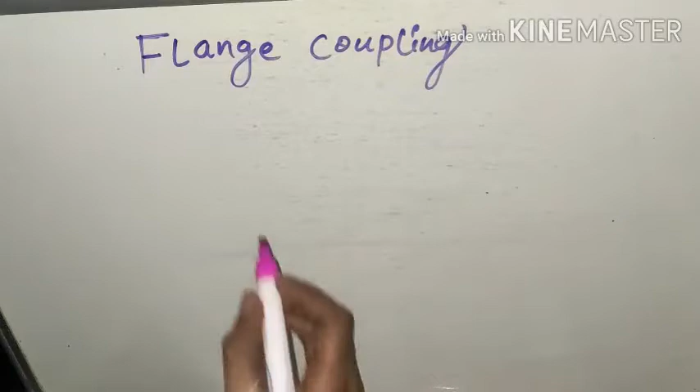Hello friends, we have a new topic, which you can see on your screen, and this is about a flange coupling. So what is a flange and why is it used in the coupling, what is the requirement of the flange coupling, all about this type of coupling and where it is used. All the details

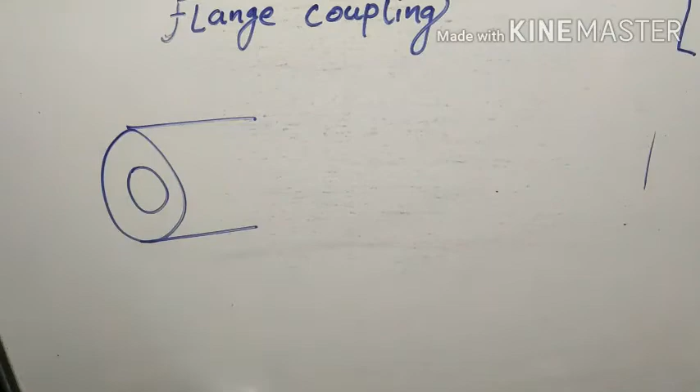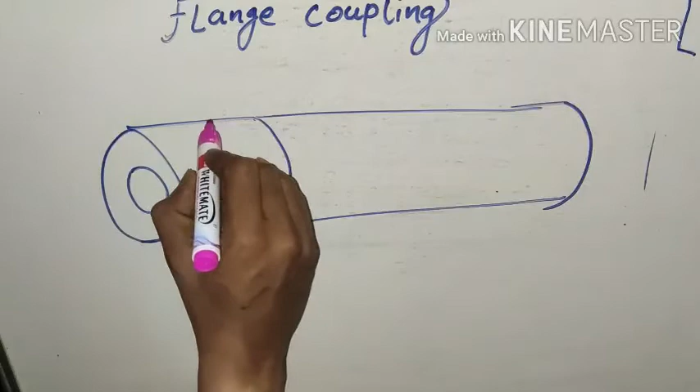Again we have another shaft like this, and now here we use two cast iron flanges like this. These cast iron flanges have holes for the threaded and bolted joint. They have recesses to insert the bolt or threaded bolt.

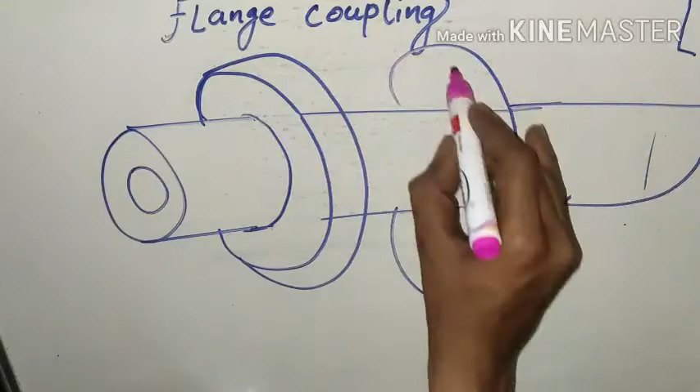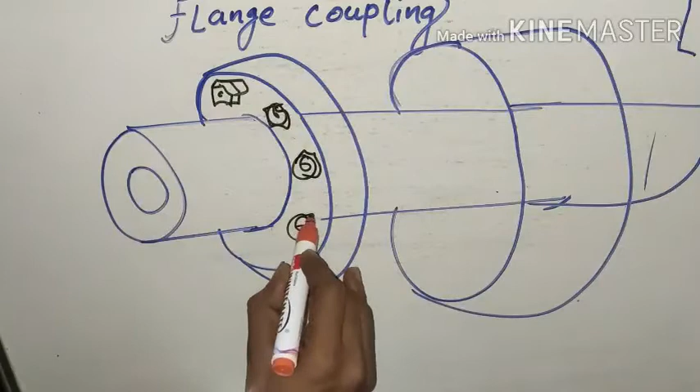So this one is your first, and again we use the other, same like this. As I already told, this has an arrangement for bolts and nuts like this, around 4, 6, 8 or 12 nuts are used. And there are recesses for both the flanges.

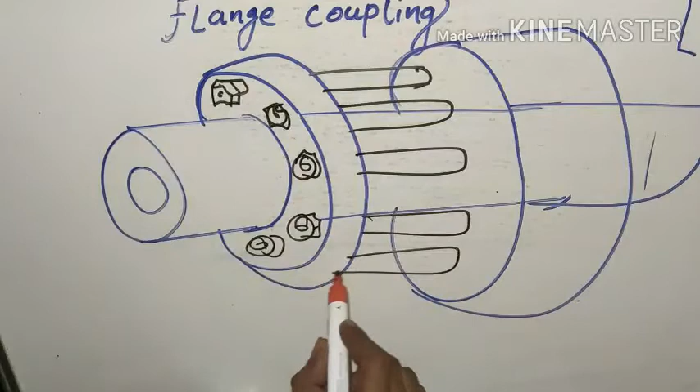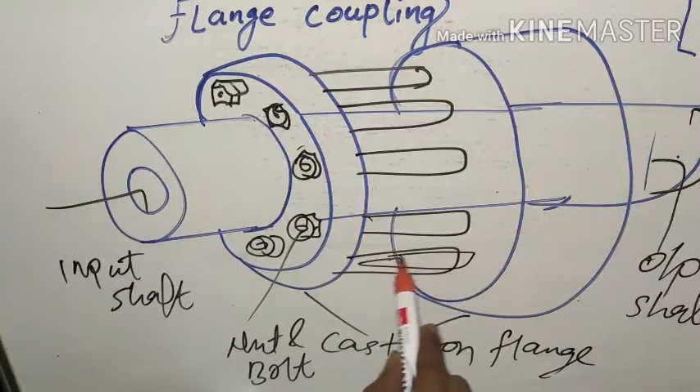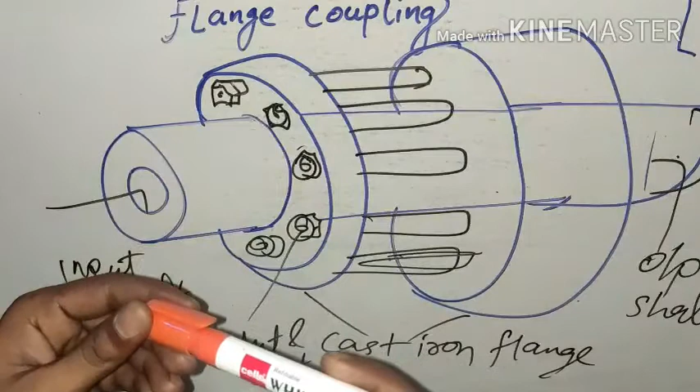So this is your cast iron flange. This one is your input shaft and this one is your output shaft. This is your nut and bolt arrangement. When these two come close to each other, from the end we use two cast iron flanges which have holes for inserting the nut and bolt. These flanges have recesses for inserting the nut and bolt.

So this is the most extensively used coupling. Its application: it is used for heavy loads and large shafting.

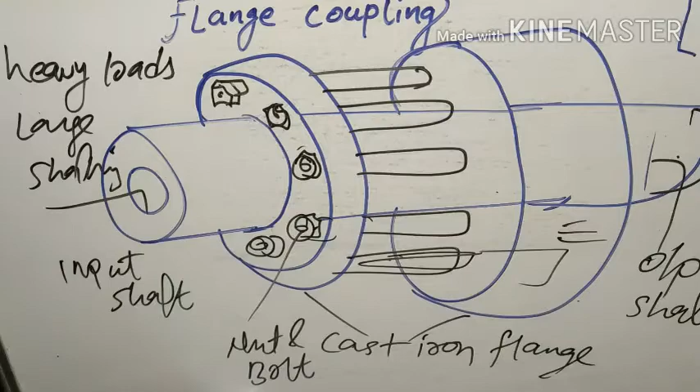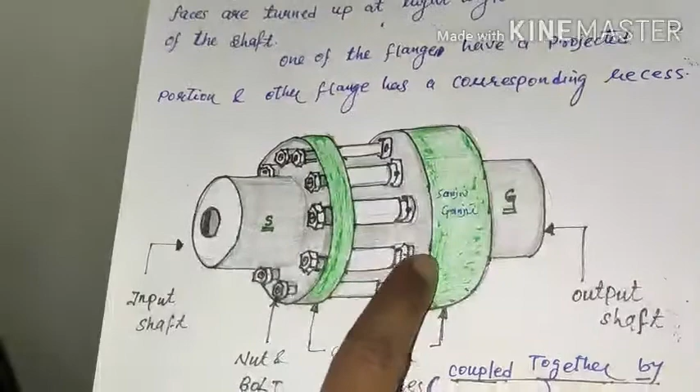So now we can move to the next section. The flange coupling looks like this, and this is your flange, which is made of cast iron. It is used for connecting the shaft ends, and the flange has recesses for inserting the nut and bolt on the other side of the shaft.

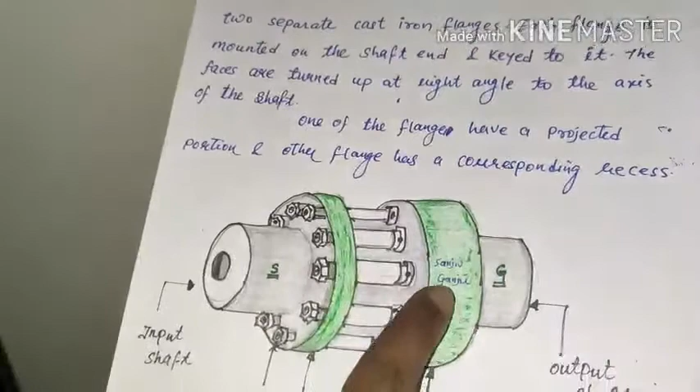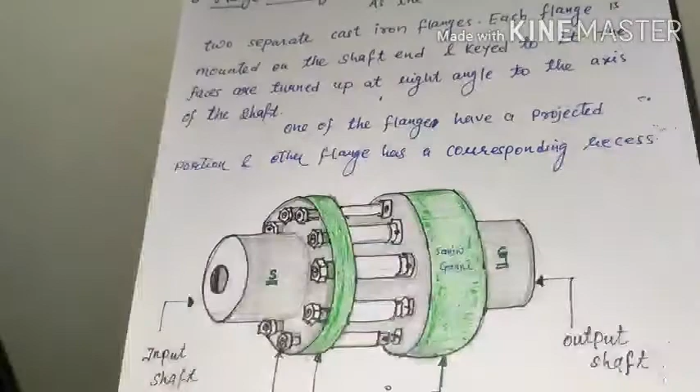When we insert the shaft through the hub of the flange, we make tight contact, so these two flanges have contact and no looseness, because looseness causes misalignment of the shaft and it doesn't work properly. This is your nut and bolt, input shaft, and output shaft.

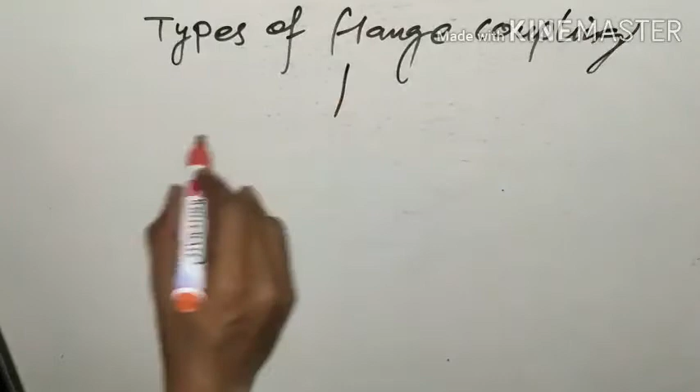So now we can move to the types of flange coupling. Flange coupling is basically divided into three types. First one is protected type, second one is unprotected type, and third one is marine type.

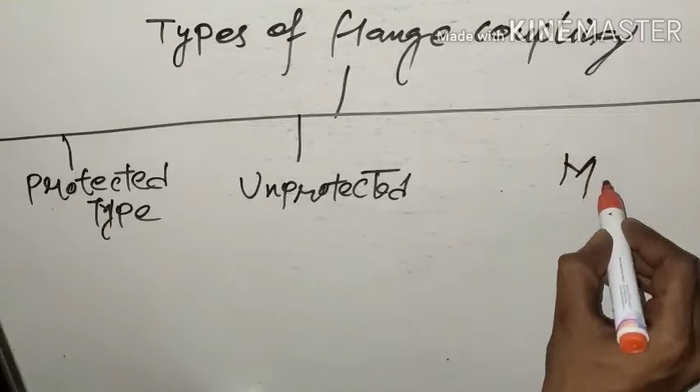For the design consideration, all important parameters are the same, but they have little changes in their dimensions. We start with the discussion of the most important type of flange coupling, which is the protected type flange coupling.

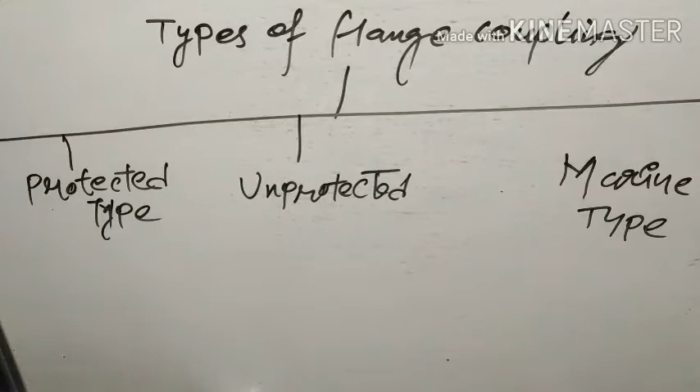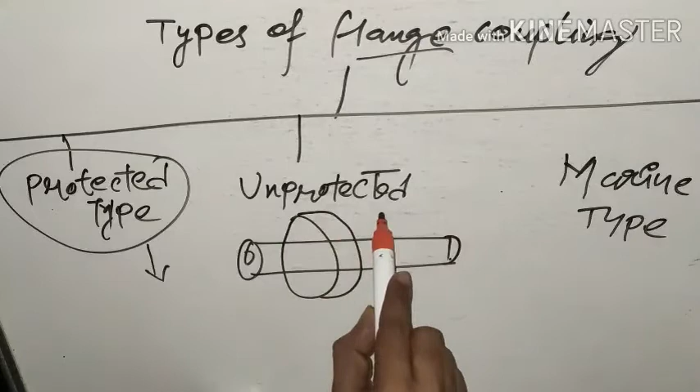So what is a protected type flange coupling? Why can we say it is a protected type? Because if we join two shafts like this one with a flange coupling, like this, then they have a nut and bolt, or between the shaft and this cast iron flange we use a key for joining.

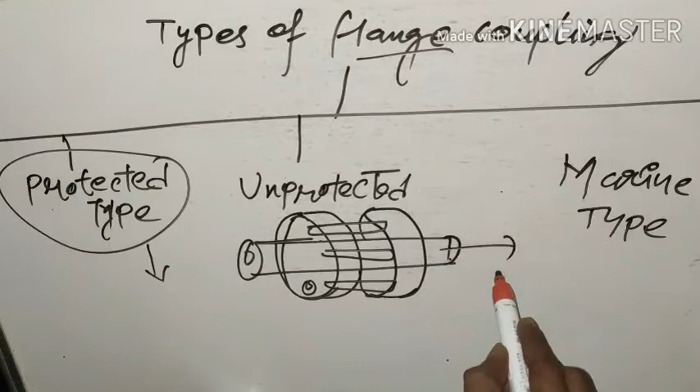So when we are working with this kind of shaft, if the workman faces any looseness, they can face some damage to their hands or any part of their body, so it completely affects the workman. That's why we generally do not use the unprotected type of flange coupling.

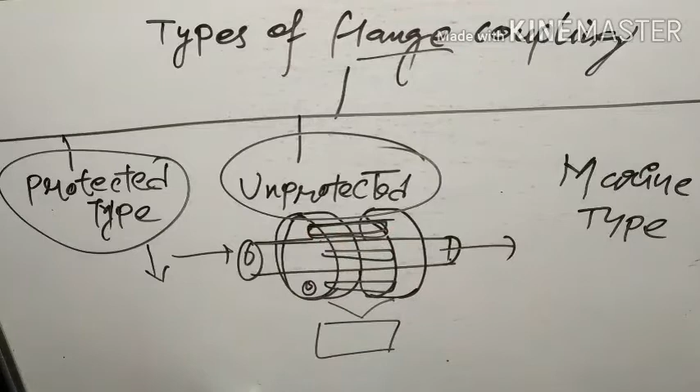So if we are working with this type of coupling, that is the unprotected type, then we must be much more careful, because the nut and bolt are exposed. That means they are out of their working surface, and they can generally damage the workman. So we don't think the unprotected type of flange coupling is safe for us, so we use the protected type of flange coupling.

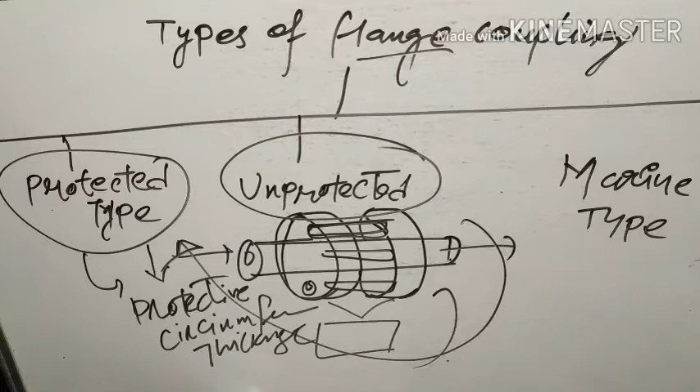All the dimensions are the same, but there is a protective circumferential flange thickness, and it protects the workman from any kind of danger, any kind of accident. So here we first learn about the parts of the protected type flange coupling. This is your protected type flange coupling.

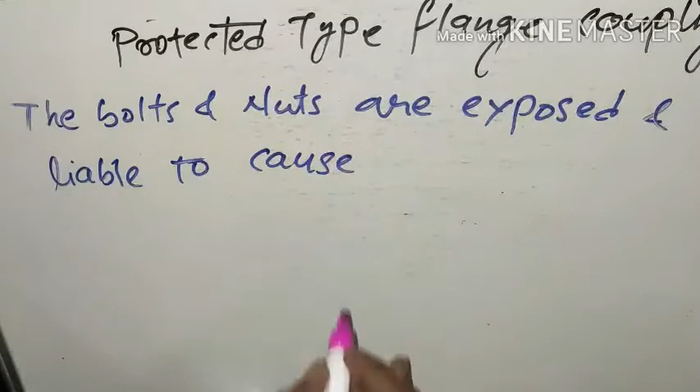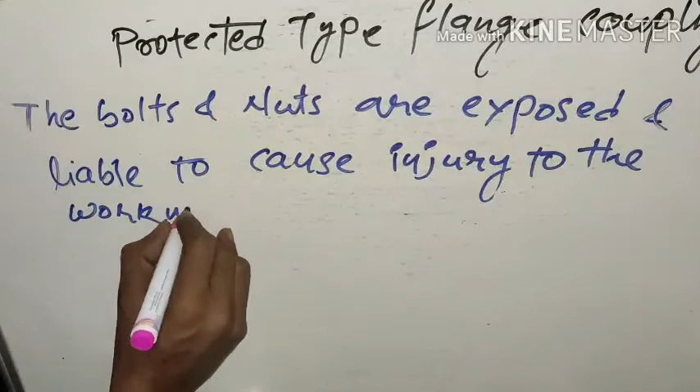So normally in a flange coupling, the bolts and nuts are exposed and liable to cause injury to the workman. Hence, as a protection, the bolt heads and nuts may be covered.

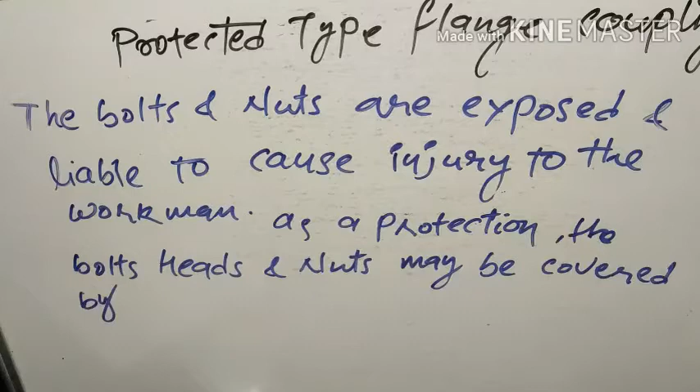The bolt heads and nuts may be covered by providing an annular projection on each flange of the flange coupling. So for protection against injury, we use the cover for bolt heads and nuts on the flange. That's why we call this type of coupling a protected type flange coupling.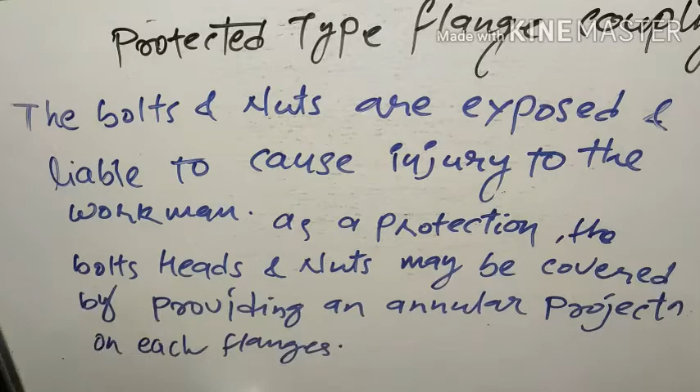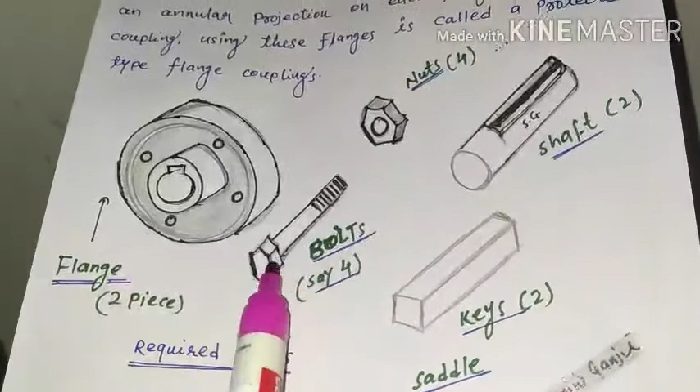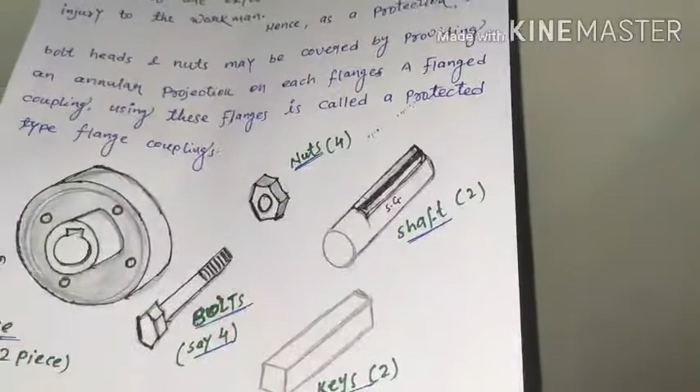Now we can see the parts of the protected type flange coupling. These are your flanges; it is 2-piece and made of cast iron. This is the bolt, and we take 4 or 5 bolts; for our application it is 4. There are also 4 nuts, and there are two shafts, one input shaft for this flange and an output shaft for the other flange, and the key for each shaft is taken as 2, which is a saddle key.

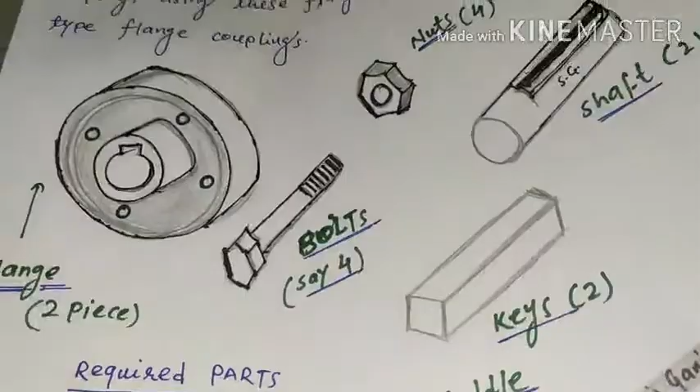Now we will look at the front view, how the protected type flange coupling looks from the front. So continue with me. This is your protected type flange coupling. This is your shaft, this is your hub, and the hub has a certain length and diameter. The shaft diameter is d, and the hub diameter from this end to this end is equal to 2d.

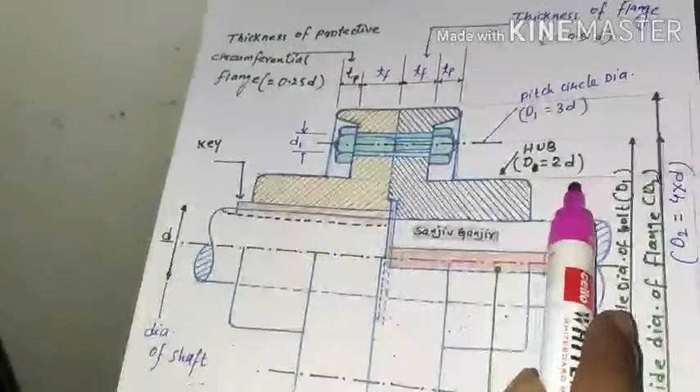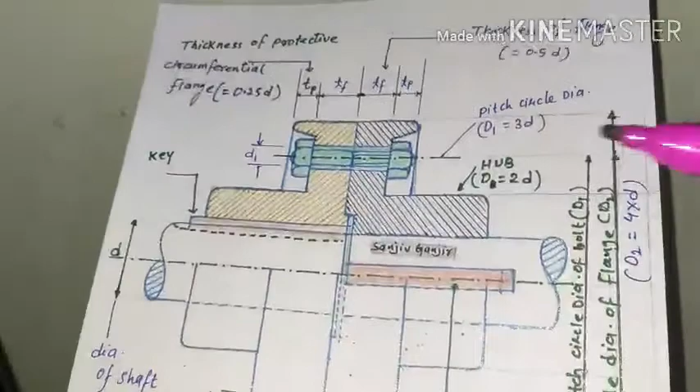Now moving upward, you see they look like a nut and bolt. The mean diameter of the bolt is d1, and from the center through this section it is known as the pitch circle diameter of bolt, which is equal to 3d, 3 into diameter of shaft. The outermost diameter is the outer diameter of flange, denoted by d2, which is equal to 4 into d.

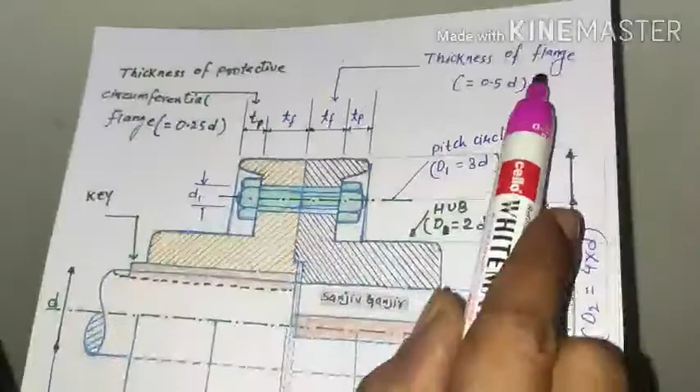Here it is tf, the thickness of flange, and tp, the protective circumferential flange, where tp is equal to 0.25 into d, and thickness of flange is equal to 0.5 into d. So all the design parameters are here. Now we can see the process by which we design a protected type flange coupling. So let us start the design of flange coupling.

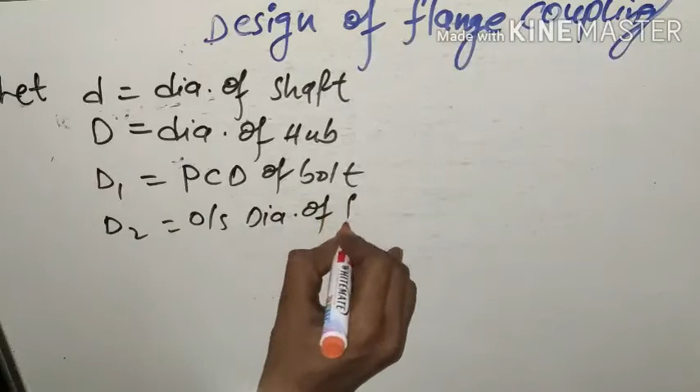Small d is equal to diameter of the shaft, and as we discussed earlier, capital D is equal to diameter of hub, capital D1 is equal to pitch circle diameter of bolt, capital D2 is equal to outside diameter of flange, and small d1 is equal to nominal diameter of bolt.

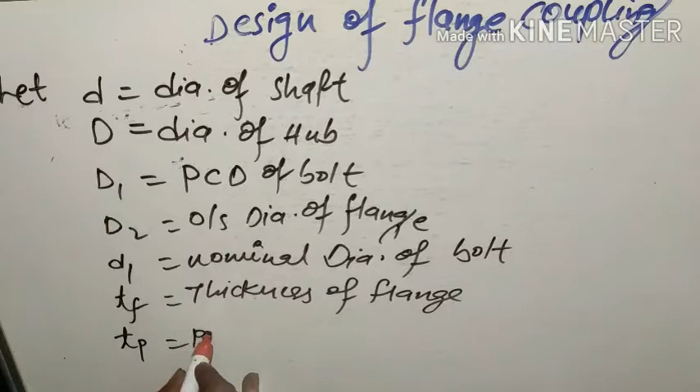Tf is equal to thickness of flange, Tp is equal to protective circumferential flange thickness. Now all the design parameters for protected type flange coupling and unprotected type flange coupling are same, but the only difference between these two types of coupling is the Tp, because in the protected type flange coupling we have a protection against the nut and bolt, so the thickness of this protective circumferential flange is TP.

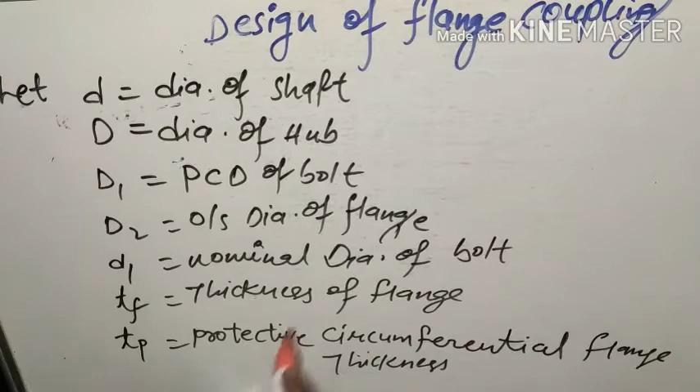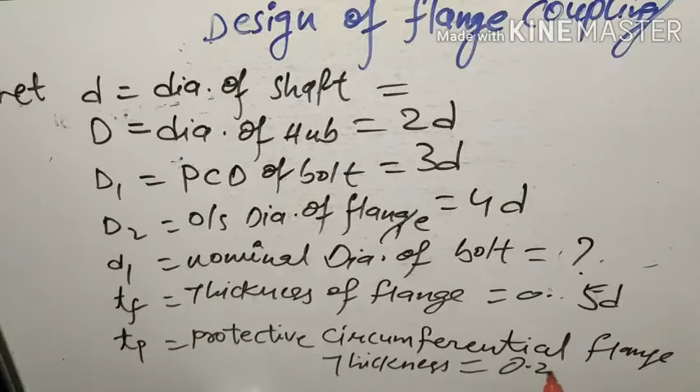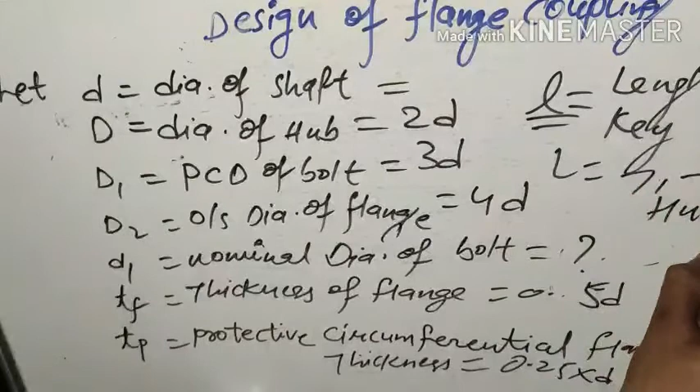So it is clear, and one dimension is more, that is length of key or length of hub. Length of key small l and capital L is equal to length of hub, and which is taken as 3.5 into D. Okay, so now we discuss the design procedure point wise, and again small n is equal to number of bolts. It is also a necessary parameter. So if the application is going on, or we can say the power transmission between the two shafts is continuing,

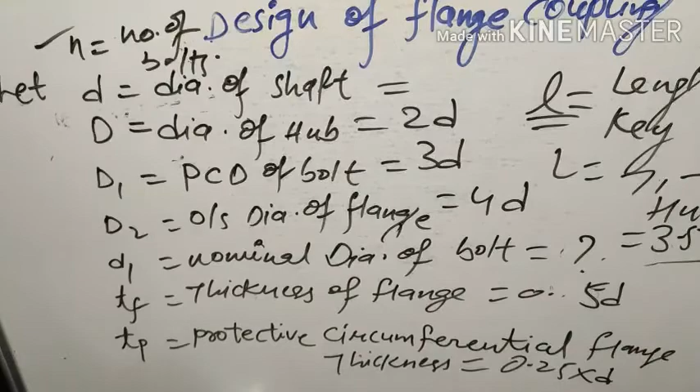then the shaft or the coupling faces some kind of stresses at certain parts. So here the following allowable or permissible values of stresses are introduced.

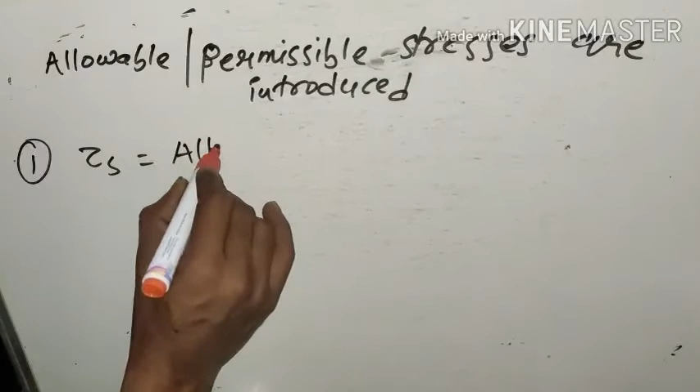So what kind of stresses act? Let's start with the discussion. That is tau s, allowable shear stress for shaft material. And the other one is tau b, that is allowable shear stress for bolt. Tau k, that is allowable shear stress for key. And next is tau c, that is allowable shear stress for flange material, which is made of cast iron.

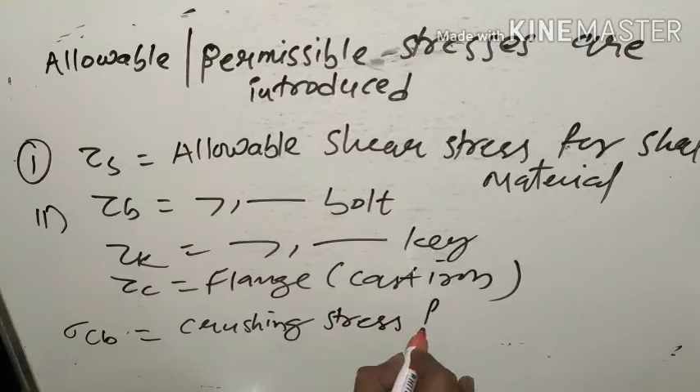And right now, this is all shear stresses, but we have some kind of crushing stresses for bolt and key. So sigma cb is the permissible crushing stress for bolt material, and sigma ck is equal to permissible crushing stress for key material. Okay, so these are the types of allowable stresses which act during the application or during the working of the shaft.

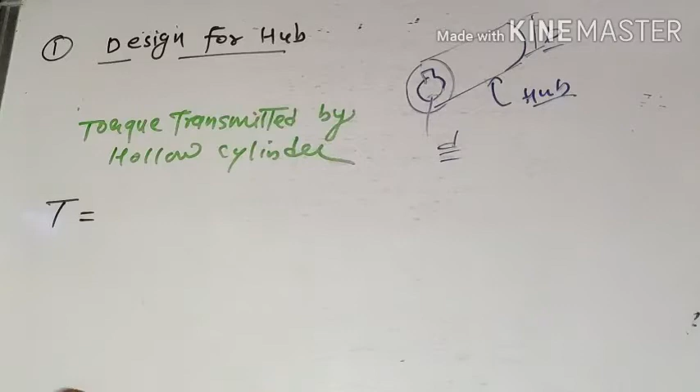Okay, so right now we are going to discuss the design for hub. So now first design consideration is design for hub. As we know, hub is a hollow cylindrical piece, and we know when torque is transmitted by a hollow cylinder, then it is given by T is equal to pi by 16 into tau c into capital D power 4 minus small d power 4 upon capital D. Okay, so here we check the induced crushing stress, induced shear stress tau c in the hub.

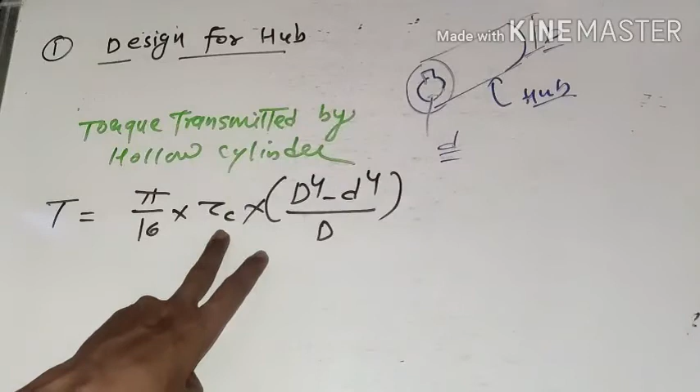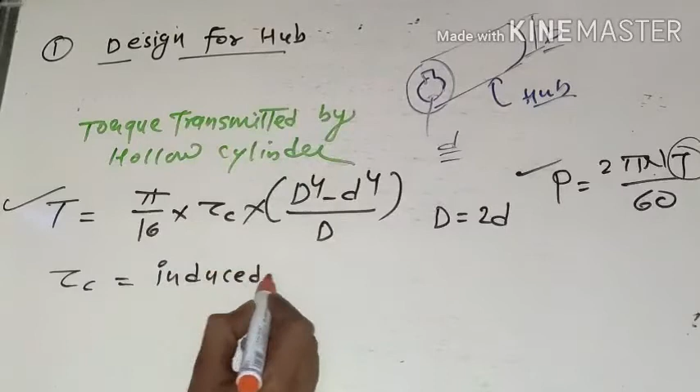Right now putting D is equal to 2 into small d, and T is found from the equation of P, that is 2 pi N T by 60. So putting the value of P we find T. Now putting all the values here, we check the value of induced shear stress in the hub or in the shaft. So using this equation we check the value of tau c, and if this tau c is less than the permissible value which is given in the question, then our design is safe.

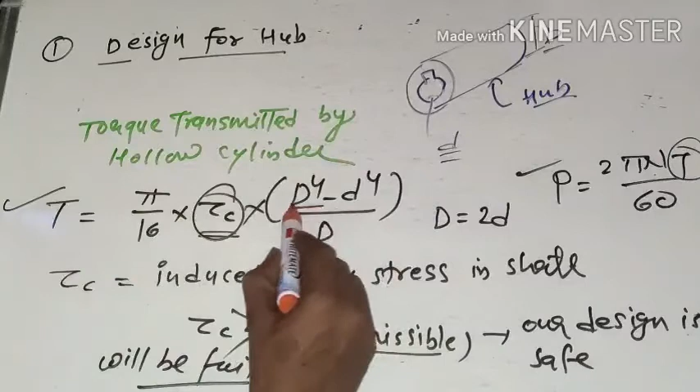But if the induced stress is greater than the permissible value, then our design will fail. If this failure occurs, then we put all the values including tau c and check and find the diameter d. Then this value is safe right now.

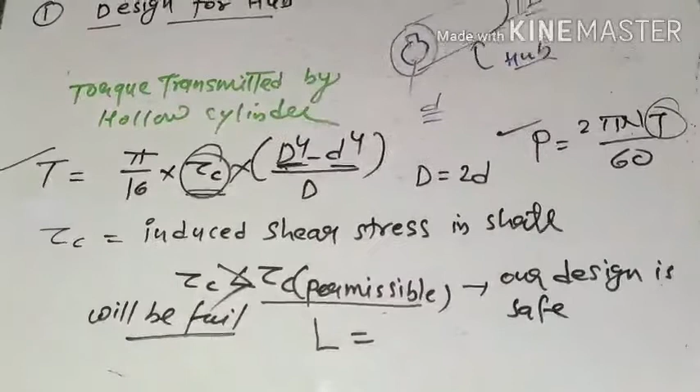So now the next parameter is the length, capital L, length of the hub. The length of the hub is 1.5 into d, because they have two pieces, one for one shaft and one for the other shaft. So for the proper dimension, the length of hub is taken as 1.5 into d for this case.

Now we can talk about the design for key. We already discussed the design of key in the lecture on design of key, so you can take advantage from there. Right now we will just shortly discuss the design of key.

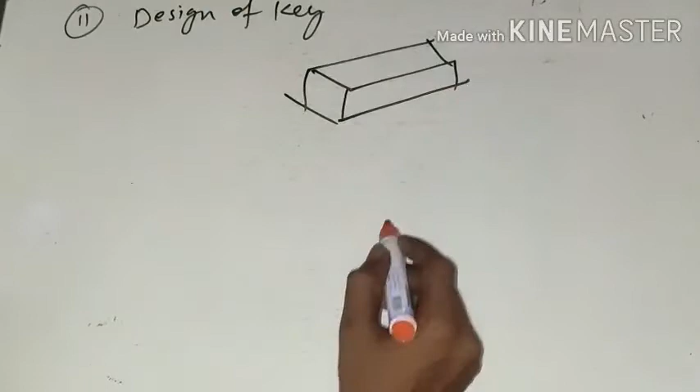So this is some kind of key. These have a length, thickness, and width. Considering this, the value of the design of the key is taken from the design data book.

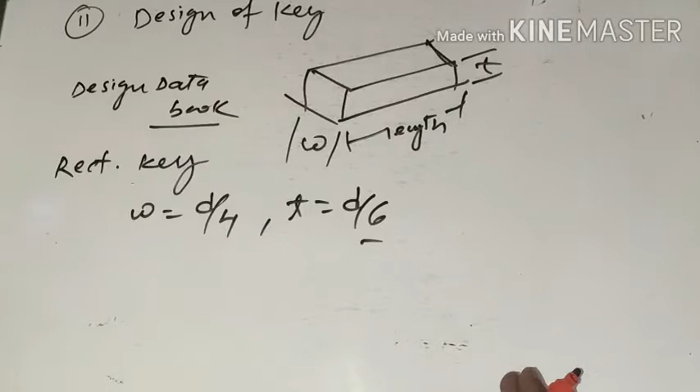All keys have certain kinds of dimension parameters. If you select the rectangular key, then the width is equal to d by 4 and the thickness is equal to d by 6, so it is a totally fixed value. Now the design of key is much important because they face certain crushing and shearing stresses, so we need to check this.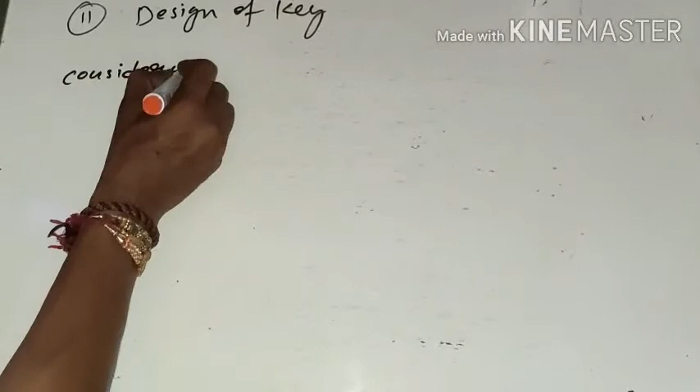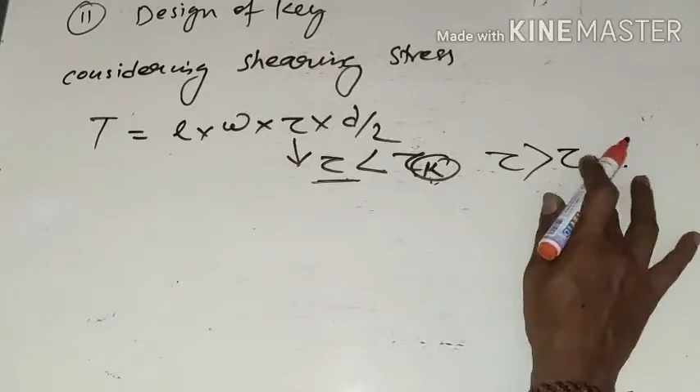So considering the shearing stress first: the torque transmitted is given by T equals small l into small w into tau into d by 2. From this equation you check the value of tau, and if it is less than the permissible value of stress for the key, then it is safe. If it is greater than the permissible value, then it will fail, so we need to change the dimension of width and length.

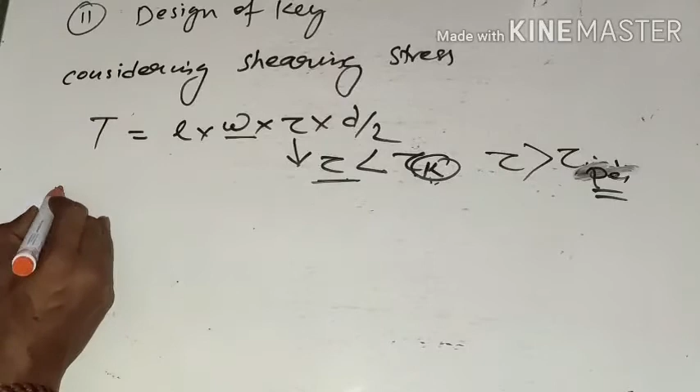Now considering the crushing stress, the torque transmitted T is given by small l into T by 2 into sigma c into d by 2. Again from this equation we check the value of induced crushing stress, and if it is less than the permissible crushing stress, then it is safe. If failure occurs, the same will be done: putting the value of sigma c and d here and finding T or L. So this is done completely.

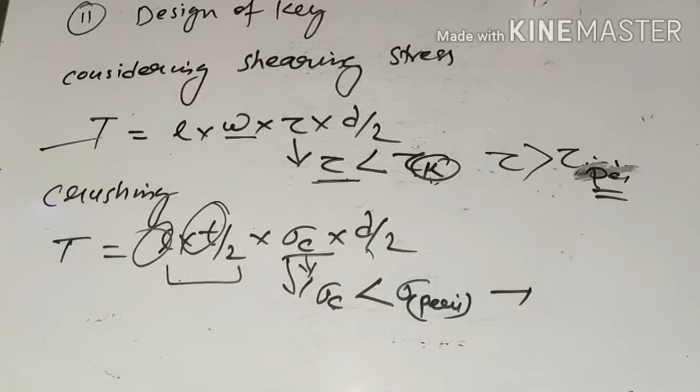Now we will go to the next section, the design of flange. So what was the parameter for the flange?

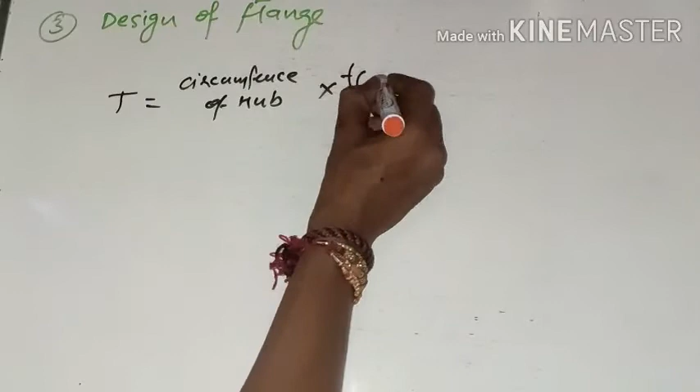So we know that at the junction of the flange and the hub, it is under shear, some kind of shear is faced when designing the flange. The torque transmitted is given by the circumference of the hub into thickness of flange TF into shear stress of flange tau c, into radius of hub, that is d by 2. So the circumference of hub gives us pi into d into TF into tau c into d by 2.

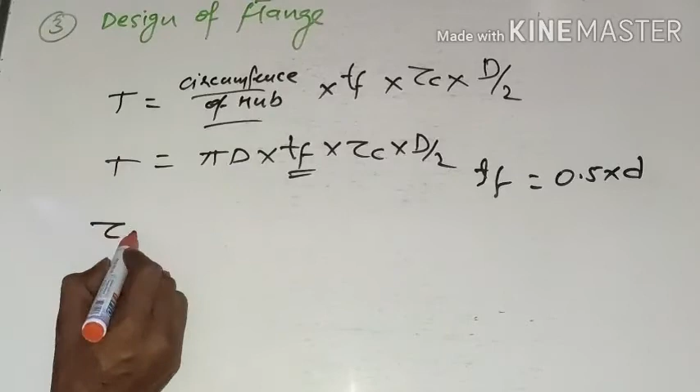We know TF is a fixed value, given by 0.5 into d. Then we put the value of TF and check again the induced shear stress: tau c equals 2T by pi d square into TF. If tau c is less than the permissible shear stress, then it is safe, and if tau c is greater than permissible, failure occurs. When failure occurs, we must put the value of stress here and find TF, not D. So this is the design of flange.

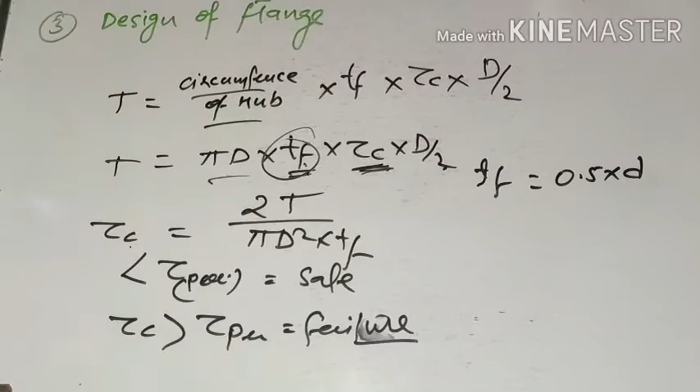Now the next section is the design for bolts.

Design for bolts. How can the bolt be designed? As we know, small d1 is the nominal diameter of the bolt.

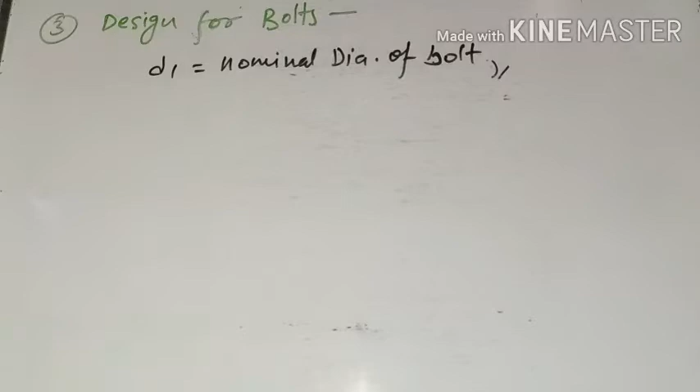Bolts are also subjected to shear stress. When some kind of load acts on the bolt, what is the value of that load? Load on each bolt is equal to area of the bolt, pi by 4 into d1 square, into the recommended stress, that is shear stress, tau b.

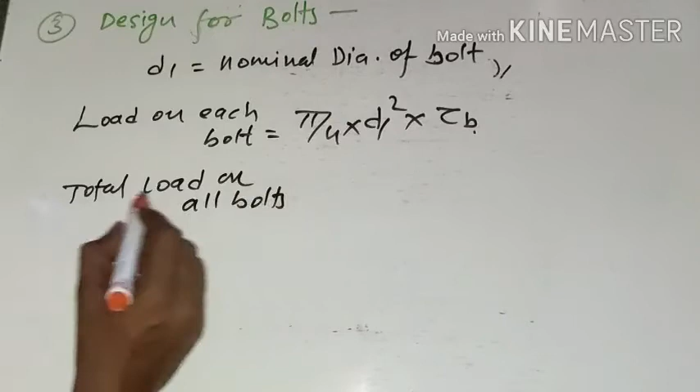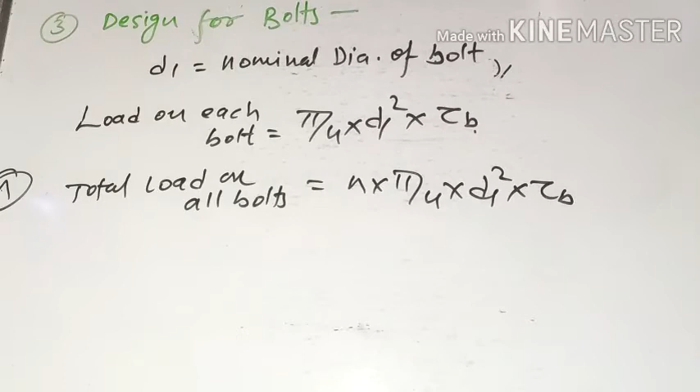If we use a number of bolts like 5, 6, or anything, then the total load on all bolts, where number of bolts is n, is equal to n into pi by 4 into d1 square into tau b. So total load on all the bolts is n into pi by 4 into d1 square into tau b.

Now total torque transmitted through the bolts is given by T equals load into radius of bolt. So load is n into pi by 4 into d1 square into tau b, into radius of the bolt. Mean diameter of the bolt is d1, and the radius is d1 by 2.

So putting all the values like tau b, d1, T, n, how is n calculated? Keep in mind: when the shaft diameter is up to 40 mm, number of bolts will be 3; if it is 40 to 100 mm, then 4; and if it is 100 to 180 mm, then about 6. This should always be kept in mind.

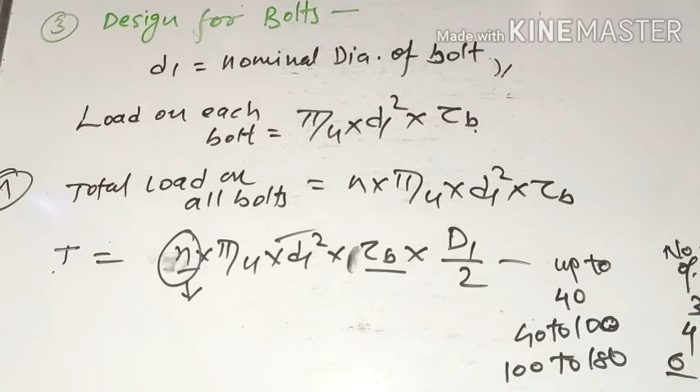Right now we can check the value of D1 here. During torque transmission, some kind of crushing stress also acts in the bolt material. What is the value of this?

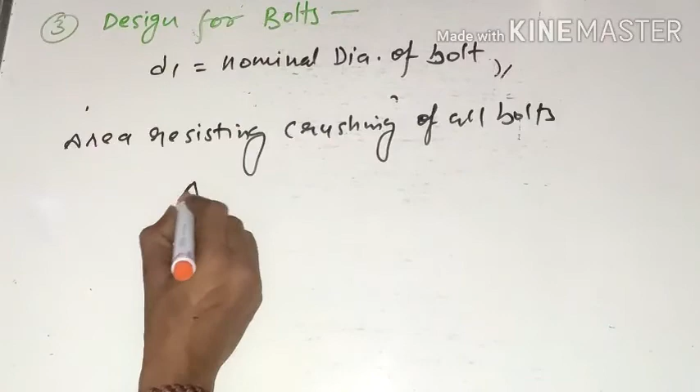Area resisting crushing of all bolts, A, is equal to total number of bolts N into nominal diameter D1 into thickness of flange TF. Because along the flange thickness the bolts are inserted, this is the area resisting the crushing.

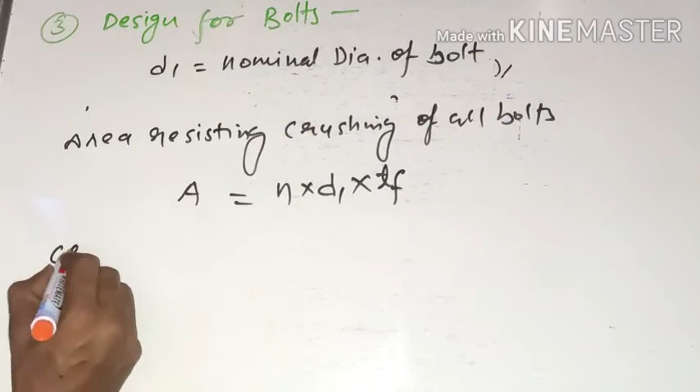Now what is the crushing strength? It is equal to area into crushing stress, including the bolt, sigma CB. So it is about N into D1 into TF into sigma CB.

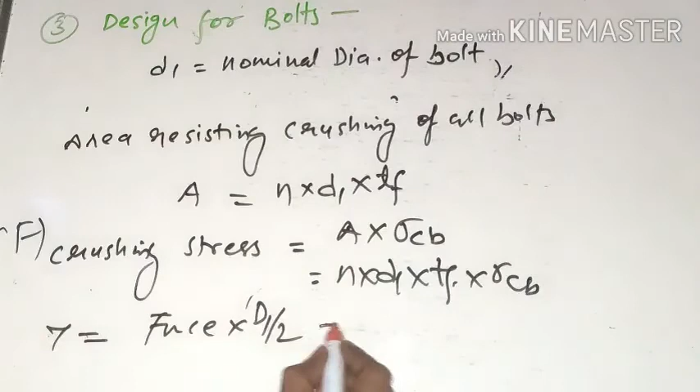Total strength is nothing but a kind of force. So total torque transmitted T is given by force into D1 by 2, because this is the mean diameter of the bolt. So force is N into D1 into TF into sigma CB, and T is that into D1 by 2.

Now putting TF equal to 0.5 into D, we check the value of sigma CB here. If sigma CB is less than the allowable value, then it is safe, and if it is greater than the allowable, then the design fails. Now we need to check the dimension of nominal diameter or mean diameter of the bolt.

So this is the design parameter or design criteria for the protected type flange coupling, and I hope you understand it.